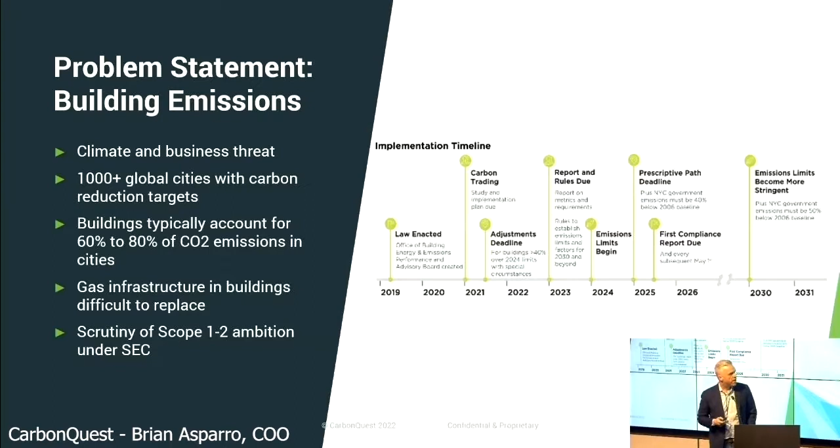Gas infrastructure in particular is what we'll tackle and discuss, and is a big issue in terms of how to decarbonize. We talked about electrification. What we're doing here is building carbon capture and also affecting embodied carbon. There's also a bit of discussion around reporting and all the data that's going into Scope 1 and Scope 2 reporting for SEC and beyond. All these pieces of information come together to look at the problem that we're trying to tackle. The problem that we're trying to tackle is natural gas use in buildings.

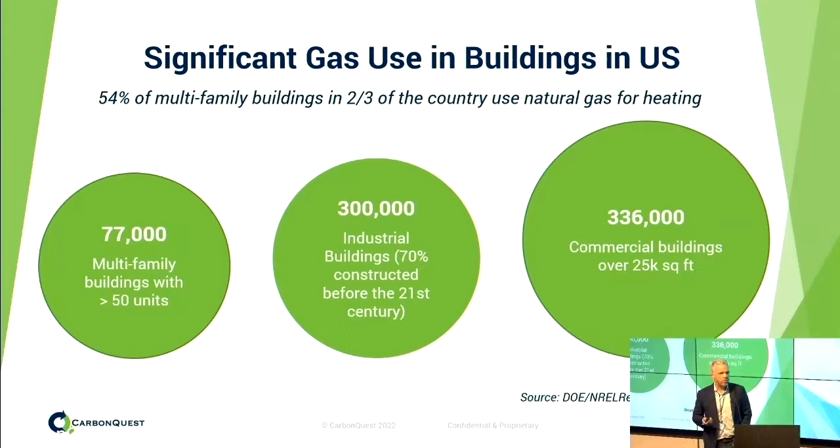And so it's a significant amount of gas that's being used in buildings around the country. Here's a few numbers, but 54% of multifamily buildings in 2/3 of the country use natural gas for heating. What are they going to do? We'd like to think that there's not a one-size-fits-all problem or solution, but the solution that we're bringing into this is carbon capture. So in particular in New York, as we've been discussing all day, natural gas consumed in buildings is about 17 million out of the 50 million tons that the city emits per year.

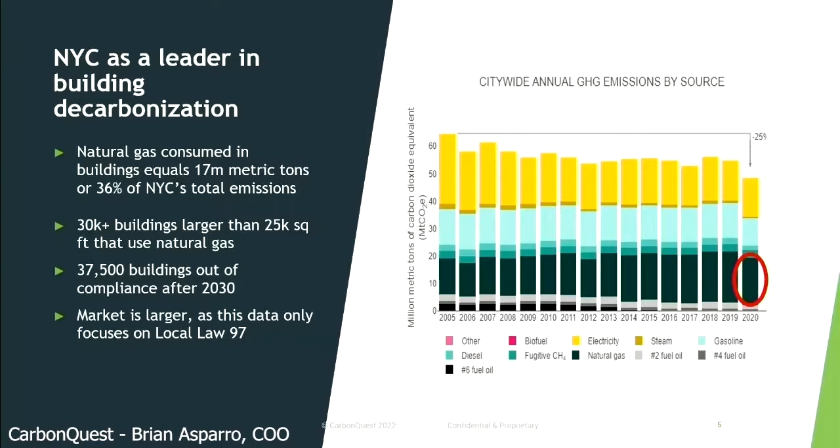Well, we developed an approach, what we call building carbon capture. We spent some time, we hired some smart people. We looked at what would be the most effective way to fit a system into a building to capture flue gas. It's a 4-step process. So on the left-hand side, you see boilers. It's essentially any stack. So if you think about a cogeneration stack, a boiler stack, typically the flue gas would go out the flue and up the chimney. That would be an emission. What we're doing here is we're avoiding that emission from going out the stack.

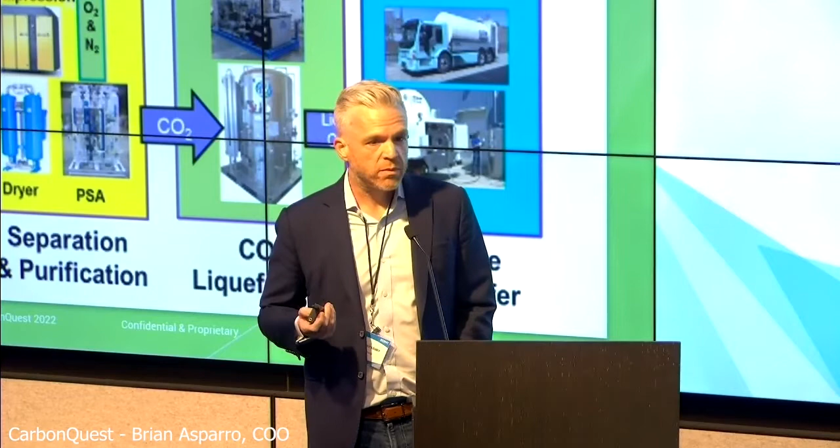In this 4-step process, we first compress that gas, we separate and purify that gas, which ultimately becomes effectively 100% pure carbon dioxide. We liquefy it and we have it on site. So that's carbon capture. What are we doing in terms of the embodied carbon part of this? Well, we sell that CO2 locally to a concrete manufacturer that is utilizing technologies, there's several of them on the market, to use CO2 to create calcium carbonate, thereby sequestering that CO2. So what this process ultimately does is it avoids emissions from going out the stack, therefore reducing emissions for a building.

What is the value proposition? So in this case, we really have 2 customers. One is a building owner, the other is a user of CO2. So for a building owner, it's immediate decarbonization, immediate reduction of carbon, not having to wait for the grid to green, not having to wait to outfit a building to electrify. You can consider it a bridge to electrification. You can consider it a solution in hard-to-abate areas, but it's immediate decarbonization. It's cost effective.

It's right now we're looking at anywhere between a 4 to 6 year payback on the capital cost, and in some cases it's a bit lower. Non-disruptive to operations. These systems typically fit in a room, a few hundred square feet, depending upon the size of a building. We're not rewiring a building. We're not changing the operations of a building significantly. Typically located somewhere around or near a stack or near a boiler room or cogeneration room.

We measure and report the emissions, so we're tracking exactly how much emissions we're reducing, and then we're improving the E in the ESG, which I think we're all here for anyway today in terms of carbon net zero. For a CO2 user, like a concrete block manufacturer, or for a utility that may use CO2 for reducing emissions, it's lower carbon footprint than most competitors, where CO2 is combusted, in many cases at an ethanol or ammonia plant, and then shipped all the way from the Midwest or the South or upstate New York to New York City.

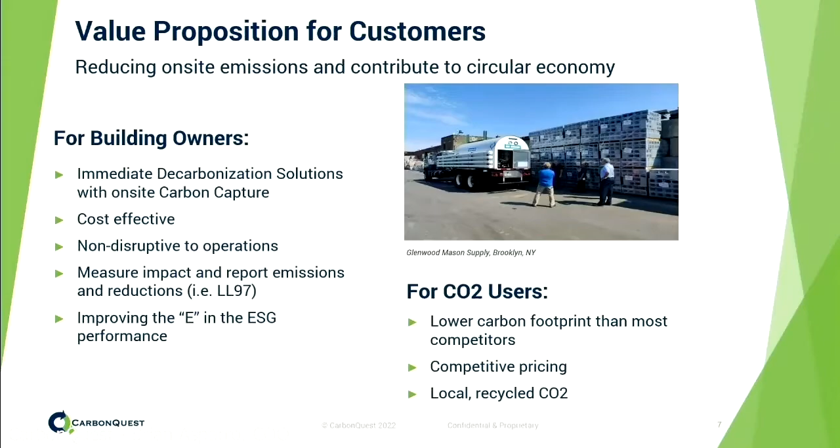It's local. So right now we are capturing CO2 at a multifamily property in the Upper West Side, and we're shipping it to Brooklyn. Much easier than shipping it hundreds of miles. And we have competitive pricing. So this is the first project that we are now operating. It's a multifamily site across from Lincoln Center. And the main objective here was to reduce emissions and then ultimately reduce potential exposure to Local Law 97.

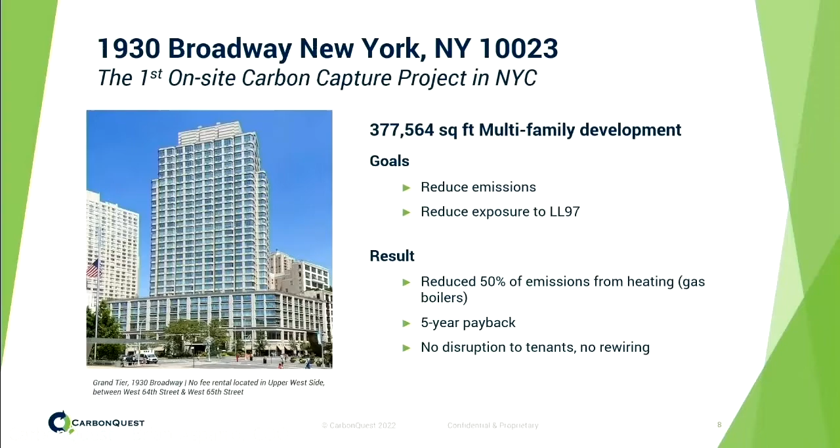What we're doing is we're reducing about 50% of the natural gas emissions. That's 700 tons of CO2 per year. So it's significant, right? There's a 5-year payback, and it's not very disruptive to their operations. We're now out and building several more. So we just think this is a tool in the overall carbon net zero landscape. This isn't the only solution, but it's a pretty significant one for buildings that use natural gas.

Where will it work? Virtually anywhere there's a stack, effectively, meaning a stack or a chimney. It works with all types of buildings, whether it's multifamily, commercial office, industrial, hospitals. It's a great application for boiler operations, boilers plus adsorptive chillers that are using natural gas for cooling, cogeneration, and combined heat and power. Flexible location.

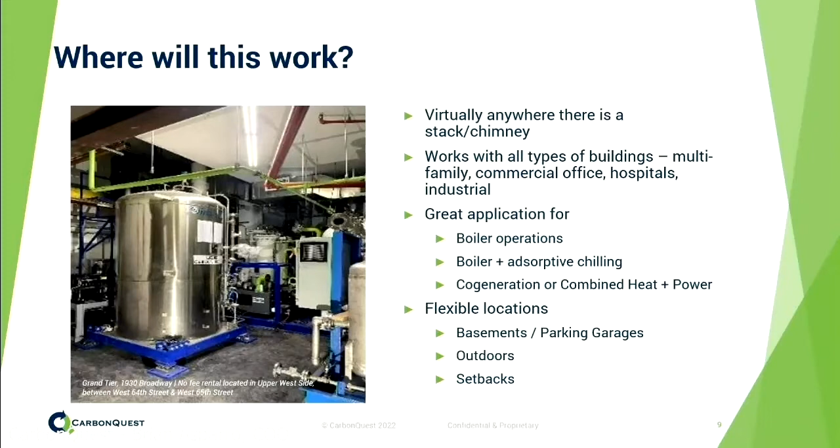So this is a picture from our first system, and it can be located in basements, parking garages. There are outdoor applications that we have designed, as well as potential setbacks as well. Let's kind of think of it as a similar situation to cogeneration or a boiler plant. Certainly trying to locate these in buildings is not an easy feat, but it's not impossible either.

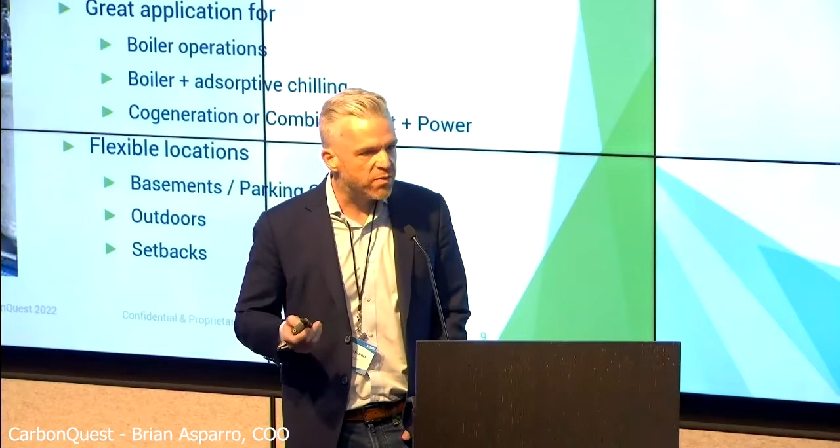We talked a little bit about the benefits. In this case, we're primarily using this tool here in New York to reduce emissions as it relates to Local Law 97. For those buildings that do not have exposure to Local Law 97 or are looking to reduce emissions and are not under a current regime, we can sell these emissions reductions into the voluntary carbon credit markets. It will create a similar style of reduction in terms of the economics for a proposal like this. The capital cost will vary by the size of the building, so it's a modular-based system. And ultimately, we feel that this is an opportunity that will certainly scale and expand.

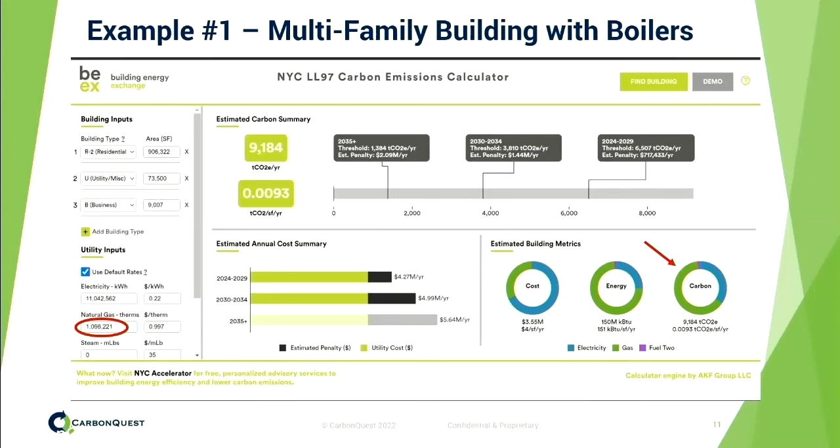These are just two last examples of what this could look like. So a multifamily building, if you're familiar with the Building Energy Exchange, it houses a lot of information on buildings through Local Law 84 that calculates the Local Law 97 penalties. And so for a multifamily building with boilers that has a significant penalty, $700,000 starting in 2024, this is the type of solution where carbon capture can work. But it could also be combined with energy efficiency, on-site solar, thermal storage, and the like.

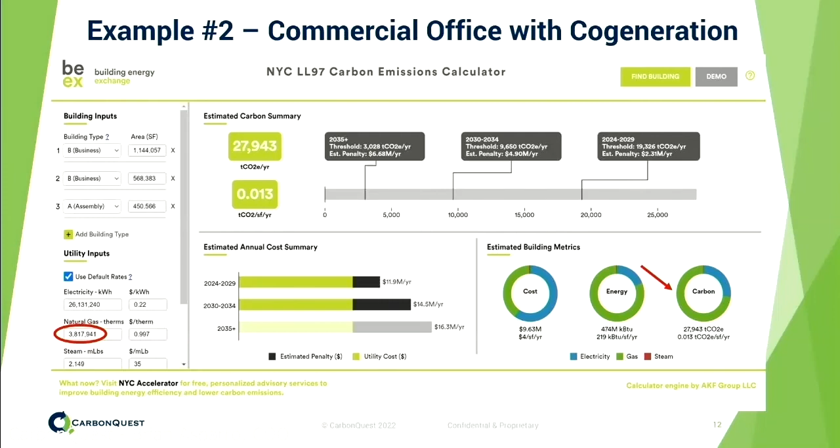We think that getting to net zero is not going to be one company or one solution that does it. And we are just trying to institute one possibility of doing so.